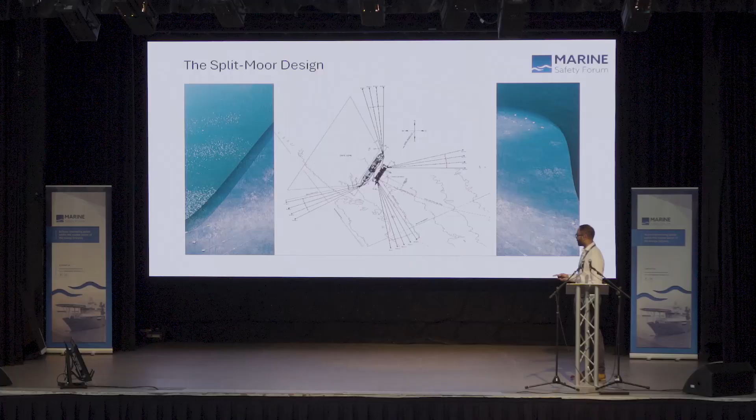The design itself was based on a standard catenary spread mooring system. But where it differed was that the mooring lines themselves were shared between the 2 floating units, and the floating units themselves were actually connected together by a series of hawsers. And this is precisely what is making this system unique and a world first to be implemented.

The project itself was executed within a 12-month period. The first 1.5 months, kicking off late January, was a concept validation study where we had to prove the installability of the system in an offshore environment. During that installability study, we quickly established that a standard base case solution came with various risks and challenges and needed a separate sort of solution to be considered as well.

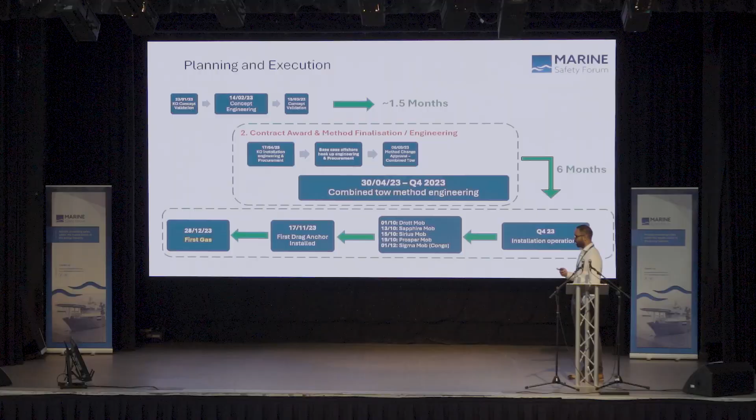So then when the concept validation was completed, we went into a detailed engineering phase, which was quite a long, drawn-out process, purely for the fact that we were working on 2 solutions. And from there, the final 3 months was purely operational. The reason for the aggressive schedule was that the client wanted their first gas by the end of the year in 2023, as usual in the industry.

For this operation, we enlisted 5 main anchor handling vessels. Some of the names you'll probably have recognized from the presentations earlier. So we had Normand Drott, Prosper, Sapphire, Sigma, and Sirius. They were our 5 main anchor handling vessels that were performing the majority of the operations. Quite high-spec, state-of-the-art vessels.

In addition to that, we also chartered 2 support tugs to support towing and station keeping and general activities as well. There were other vessels in field operational at the time as well, but those 7 build up the main primary vessels that were used.

You normally hear global operations probably a number of times when it comes to offshore executions in the oil and gas industry. This was truly global. We had engineering being performed out of our Aberdeen office, Stavanger and Oslo. We had vessels mobilized and stored in Rotterdam, transited to Congo following that.

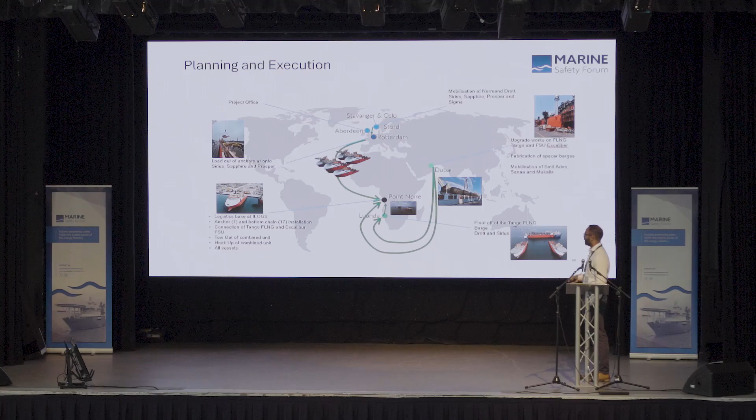We had in Dubai the upgrades of the FSU and FLNG, as well as installation of very large installation aids. We offloaded the FLNG in Luanda from a semi-sub heavy lift vessel, and then our in-country operations were based out of Pointe-Noire. So truly global operations that we performed.

So the base case solution, our primary solution, was based on a typical methodology. And for that methodology, basically we prelay the mooring lines, tow out each of the floating units independently, one by one, recover and connect up the mooring lines to the units, tension them, and then the units

are in operation. For the operation, the 2 units need to be at 25 meter separation, so that is their design separation when they're in operation. However, for the installation activities, the units needed to be at 15 meter hull-to-hull separation.

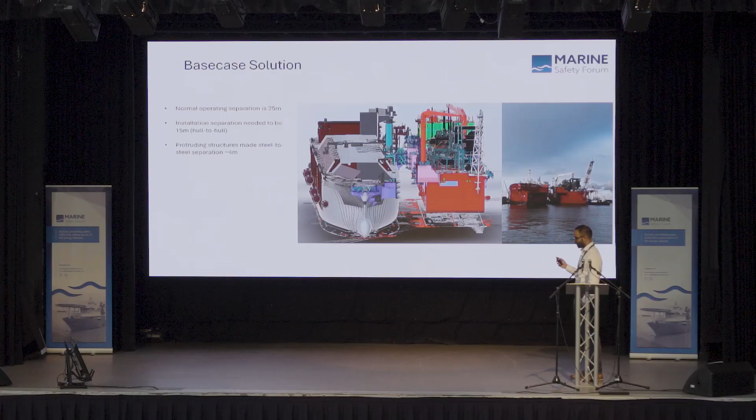The main reason for that is when we were installing the hawsers, through our assessment, we established that to be able to install the hawsers, which was effectively a cross-haul and pull-in operation, the loads were quite high, and to be able to keep the loads low and within the equipment that was already pre-installed onto the floating units by the client, the 2 units needed to be at 15 meter hull-to-hull. However, with structures protruding the sides, the steel-to-steel separation was actually more like 4 meters.

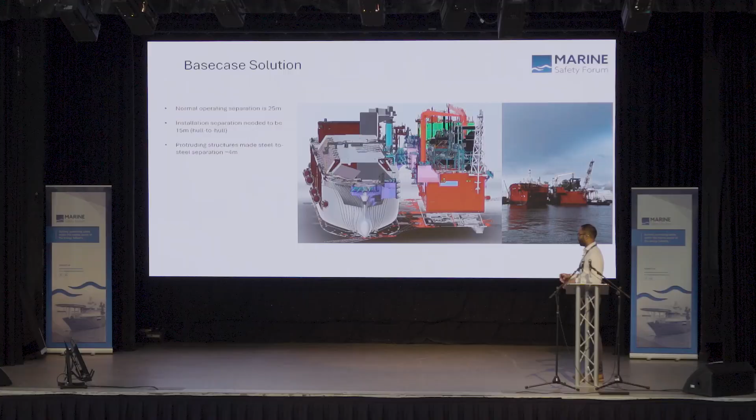So very small margins to play with. To be able to maintain that separation and also stop the two units colliding from one another, we needed fenders. We established that there weren't any fenders large enough to be able to keep that sort of separation, so then we realized we needed a frame.

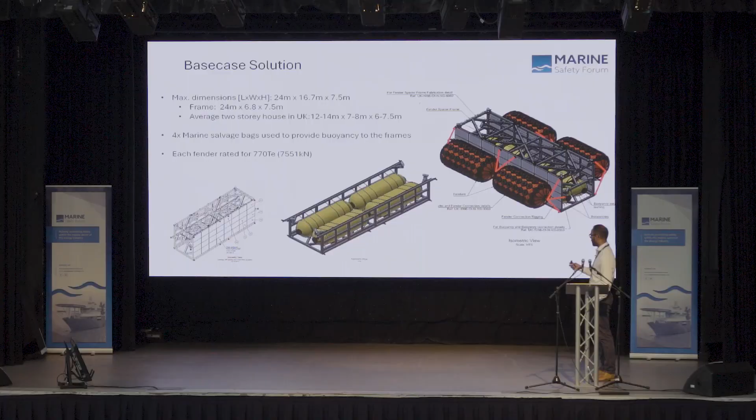Our original plan was to procure a barge off the shelf, but then the compression loads that were estimated were too high for any barges on the shelf to be able to withstand, so we had to design and build a frame ourselves, to which the fenders would then attach. To keep the frame afloat and not have the fenders act as a buoyancy element, we installed 4 marine salvage bags into the frame, and that kept the frame afloat and allowed the fenders to do what they were needed to do.

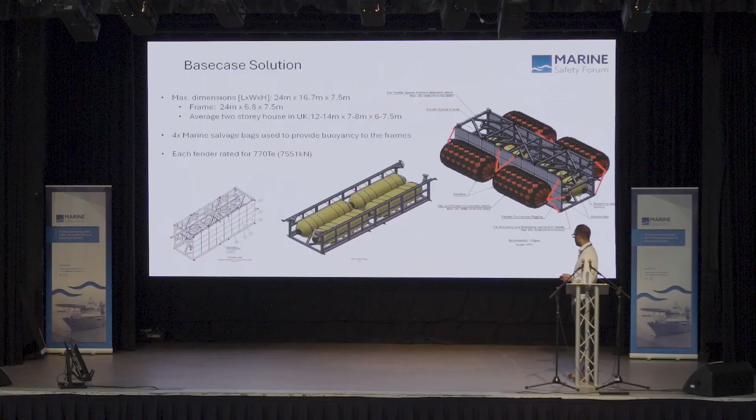The frame itself was significantly large. It was around 24 meters by 16.7 by 7.5 meters in dimensions. To put a little bit of context in that, an average 2-story house in the UK is about 12 to 14 meters by 7 to 8 meters by 6 to 7.5 meters, so significantly larger than an average 2-story house in the UK. Each fender was rated to 770 tons compression forces.

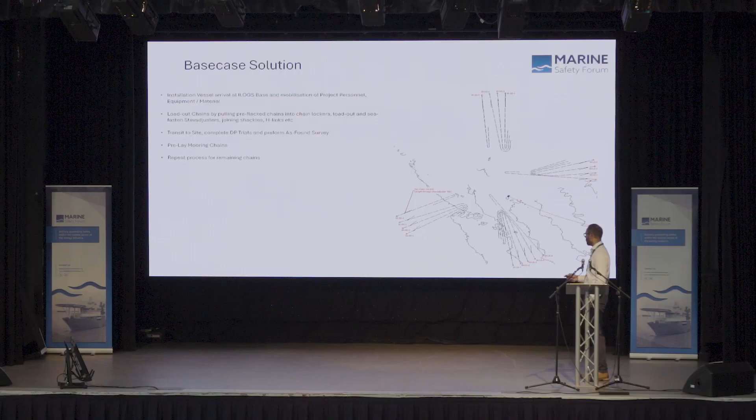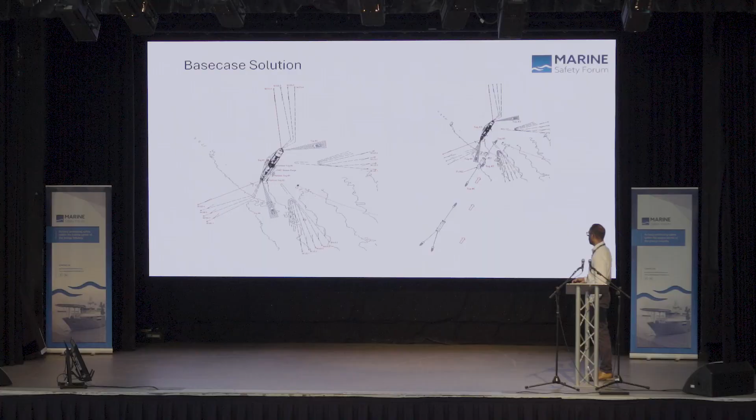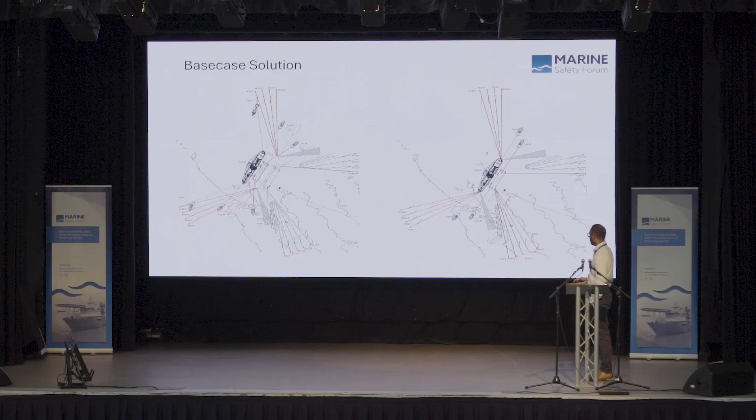So, just to go through this very quickly, the base case solution was to pre-lay the mooring lines in an arrangement where they could be recovered, tow out each of the units independently, and first hook them up to initial mooring lines to allow control of the units, bring out the spacer frames with the fenders connected, and then bring out the second unit and connect it up to a minimum number of mooring lines. Then install the hawsers in between the two units, connect the remainder of the mooring lines, tension them all up, which would then bring them into their final position, and then they would be in an operational position.

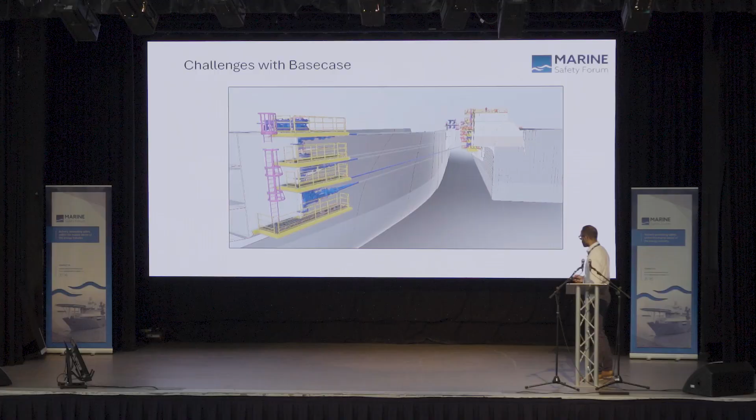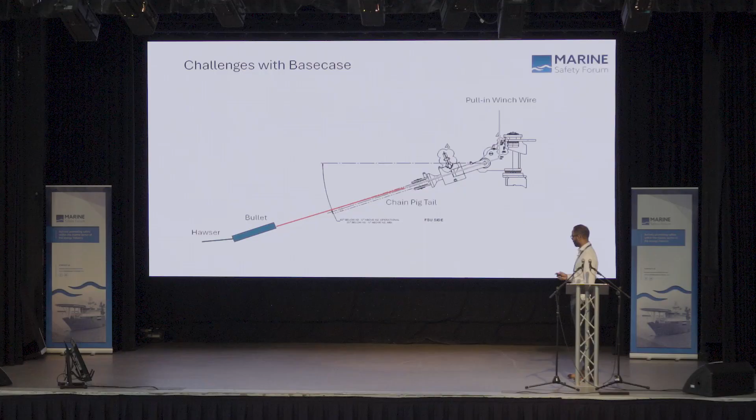But there were 2 main significant challenges that we found with this base case solution when we were going through the engineering process. Both were related to the hawser installation. For the hawser installation, because it's a cross-haul and pull-in operation, in the final stages of the pull-in the loads were increasing exponentially, so much so that they were actually exceeding the capacity of the pull-in equipment on the topsides of the units. So technically and practically, we weren't able to execute the base case solution with the equipment on board, and we had no opportunity to install larger equipment on board to overcome those larger loads.

The second main problem, and that was actually the primary reason, not the technical one, was more of a practical and human element, which fits nicely with the presentation we just had. The hawsers, along with temporary lashings, etc., meant that there would be people working in very close proximity to lines under very large amounts of tension. In the final stages of the pull-in, it required human intervention, so people are in direct line of fire for these lines under high tension.

So then we needed a solution that removed that risk away from an offshore environment and into an environment that was a lot more controlled. Although the risk of working around lines under high tensions was present, it was a little bit less and in a more controlled solution. So then that brought us onto the combined tow solution. We knew we needed to take these units and connect them up together in an environment where we weren't exposed to the swells and the winds, etc. But what we didn't know was how to tow these 2 units out together.

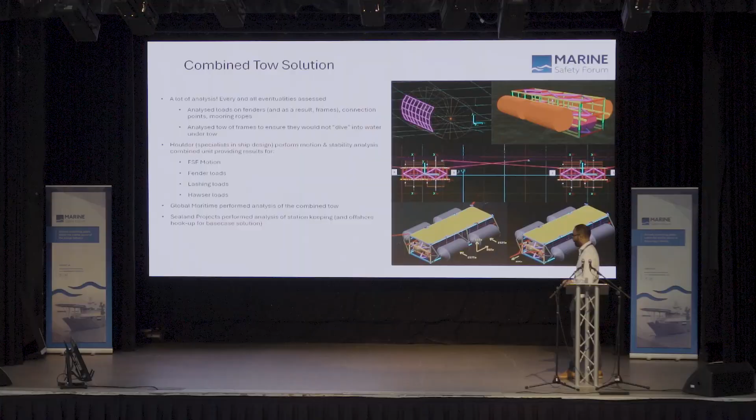So a huge undertaking and a huge amount of analysis that went into confirming that the combined tow was possible. But analysis only proves your theory in a theoretical manner. It doesn't actually show you in a practical sense that things can be actually done.

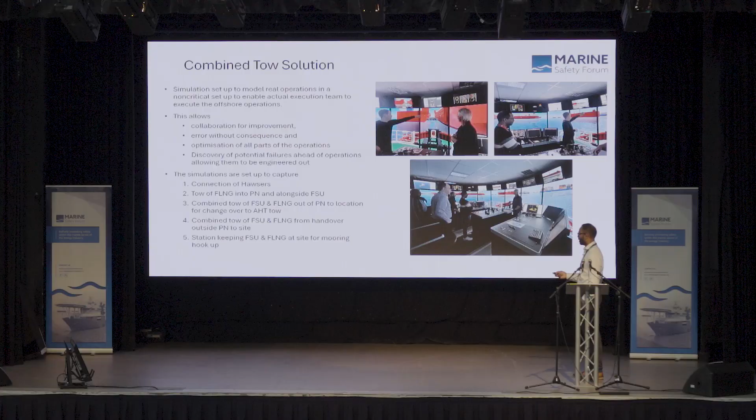So to allow a level of confidence that we could do this in a practical environment, we did some operational simulations at Kongsberg Maritime in Norway, where we gathered all the operational people, which was around 20 to 50 people at a given time, consisting of tow masters, captains, harbour masters who were flown over from Congo itself. And we practiced everything that we were planning to do as part of the operations.

This was broken into 2 main activities. One was the inshore hookup, which was the connection of the hawsers from one vessel to another. And then the other was the combined tow to the installation site. So towing it from Pointe-Noire port out and then into the offshore installation location.

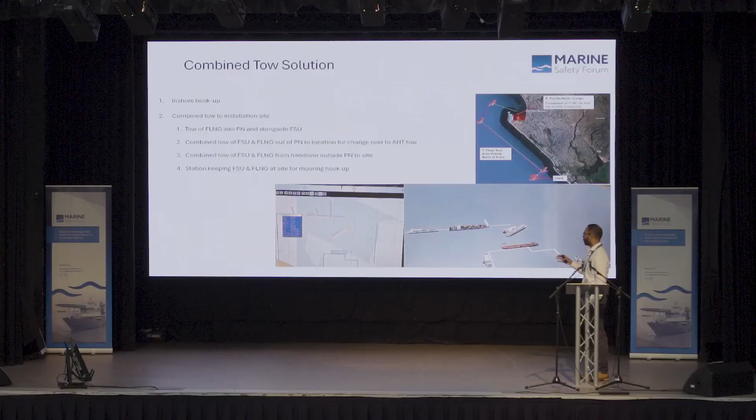And the combined tow was broken down into further subcategories as well. And the one main priority that we had was exiting out of Pointe-Noire port and then getting ourselves into a heading that was comfortable for the 2 vessels. For anyone that's operated in Pointe-Noire and in Congo, you'll be familiar with the strong swell that's prevalent there, coming primarily from the one direction.

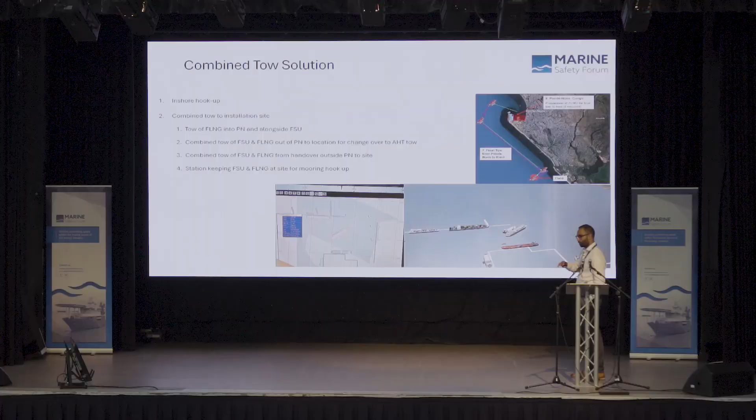With these 2 large vessels, it was very important that almost immediately upon exiting the port that we went head on to that swell. Otherwise, we would basically be in a similar situation as our previous companies that tried to perform this operation.

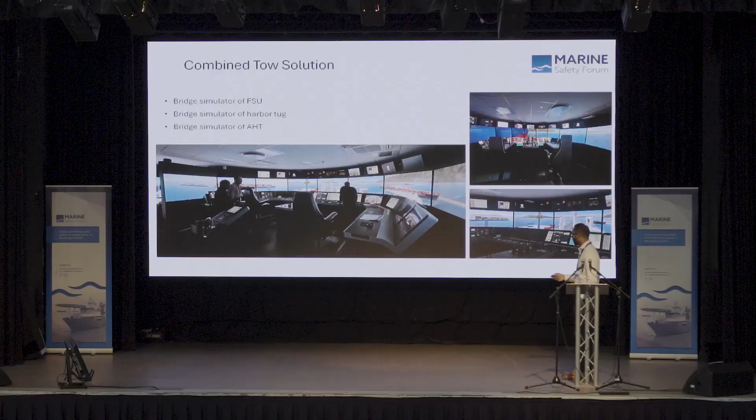So for the simulation, we had 3 bridge simulators, one for the FSU, one for harbour tugs, and one for the anchor handling vessels. Everything was set up in accordance to how we would do it, all with the exception of the background. We didn't have enough time to quite simulate the background of Congo, so what you see there is Norway, but everything else was, in essence, identical to what was going to be experienced live.

So then we went on to the operations themselves. So for the operations, we started off with the pre-laying of mooring lines. A different contractor had already pre-installed some anchors, the majority of which were drilled and grouted piles, and some of them were actually drag anchors due to some challenges that the other subcontractor were having. The mooring lines had inline tensioners, which were the Stevadjusters, and so we went through generally quite a standard operation of installing mooring lines from an anchor handling vessel.

The drag anchors were actually part of our work scope, so because of the challenges the other contractor were having, Eni requested that we install some drag anchors. They were 66-ton Stevpris anchors, so I think they were about 35-ton anchors, but with added ballast, increasing it to 66 tons in total.

We installed these anchors using a 2-vessel solution, so effectively one vessel pulling the anchors off the initial vessel and then collectively lowering the anchors down to seabed. And then due to the force needed to embed the anchors, it was a tandem pull using 2 vessels to achieve the load that was required to embed the anchors into the seabed.

From there, we went to Luanda and we offloaded the FLNG unit that was dry towed from Dubai. A semi-sub heavy lift vessel dry towed it from Dubai over to Luanda. 2 vessels, Sapphire and Prosper, if I remember correctly, offloaded it from the semi-sub vessel. So as you may be aware, the semi-sub effectively submerges the deck and then the unit becomes floating for the anchor handlers to effectively pull off, and then the deck rises and the transport vessel moves away.

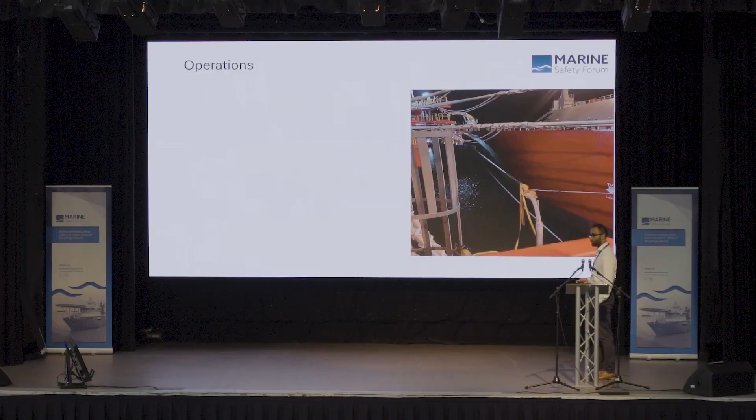You can see all the hawsers were pre-installed onto beams in a predetermined manner to allow the installation of these in a predefined sequence, because the hawsers were effectively a spider web, basically on top of one another. You can see from the video, hopefully it plays, how slow the operation was, and further cements the reason why

we needed to move this to an inshore location, because although it's not the North Sea and we're not exposed to high waves in Congo, we did still have a very short operability window to be able to install these. And in fact, it was so short that in reality, we wouldn't have actually seen a window long enough to be able to install the hawsers in an offshore environment. So one of the main reasons why we moved inshore.

You can see from these images here what I meant by the spider web of high tension lines. Again, reinforcing the reason why we needed to move these away from an offshore environment to an inshore environment, and all the various installation aids that we needed to install these hawsers.

And then the final stage of the pull-in, the human intervention that was needed to be able to secure the hawsers into their receptacles. Now, to do this in an offshore environment with lines under very high tensions was a huge risk that we were not willing to take, and that was the reason why we moved away from the conventional method and employed a method that was less conventional and perhaps the first time achieved on vessels that large.

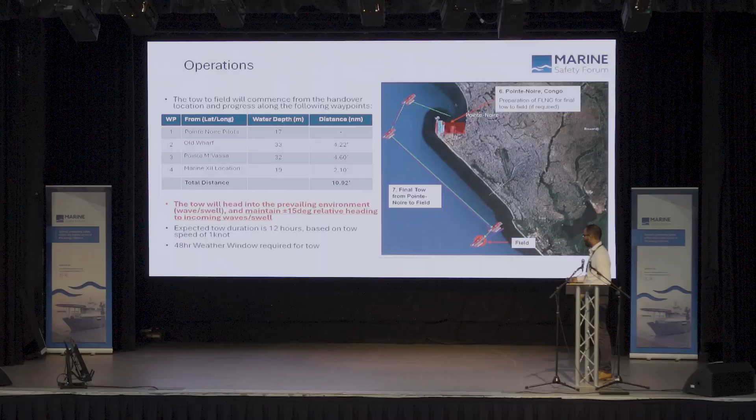It wasn't like any typical tow. We weren't pulling the units down to their location. The units were effectively being crabbed down. So we couldn't adjust that heading. We needed to maintain that heading, and so it was more of a crabbing down to the final installation location. So the tow occurred in about 1 knot speed and took around 12 hours duration in a weather window of approximately 48 hours.

The tow was performed with 4 of the 5 Solstad vessels that were named earlier, and then we had the 2 support tugs following the tow all the way. The tow in Pointe-Noire port, there's a short channel that we had to maintain due to the draft of the larger FSU, and that channel we had to use to exit the port, adding further complexity to exiting the port itself. Once we exited the port, and my little cartoon character of the vessels has disappeared, we adjusted the vessels, so we exited the port using the harbor tugs.

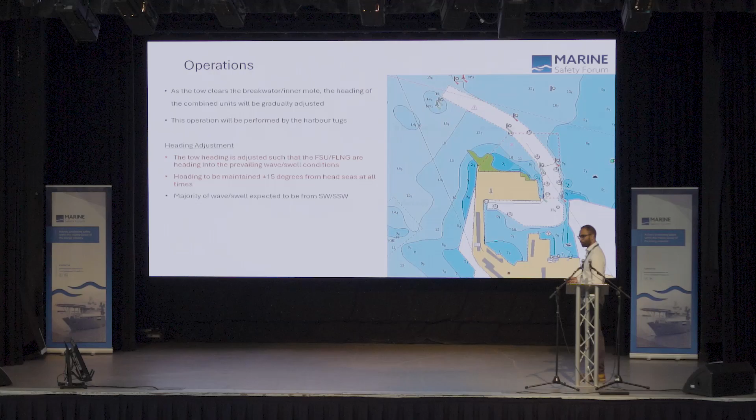We then went to the handover location, handed over to the Solstad anchor handling vessels, and then we started our tow down to the offshore site. Once we were in our location, we assumed our station keeping positions. We connected up 2 vessels to the anchors on the seabed and used them as live anchors, using the winches on the aft deck of the vessel as a means of controlling the FSU and the FLNG tensions and maintaining their positions, while the 5th anchor handling vessel went around, collected the pre-laid mooring lines, and then connected up to the FSU and FLNG.

That vessel then went around all the various Stevadjusters that were subsea and on the seabed and performed the tensioning operations. It was a 2-round tensioning operation to achieve the required tensions. At the very end of the operations, we had a bonded riser that we needed to install between the FLNG and the riser platform to allow our client to achieve their very important first gas, all done within the period that they requested. So they achieved their first gas on the 28th of December, and our project was completed. Operationally, it was completed within 6 months.

So from the start of the detailed engineering to the completion of the hookup operations was done within 12 months, and our final vessel demobilized from Congo at the start of the year in 2024, 5th of January.